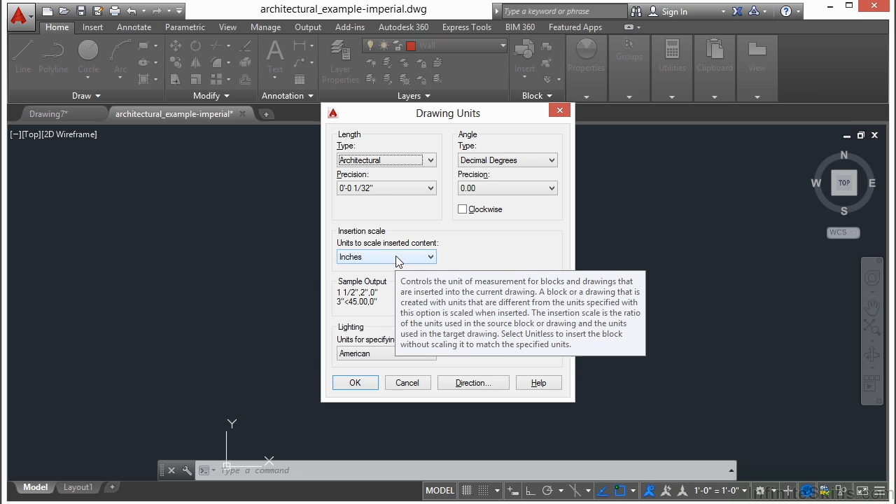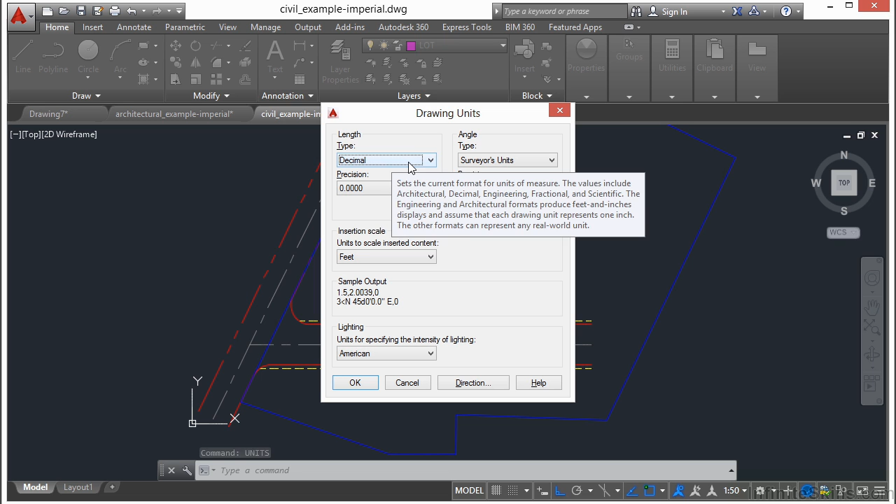Now if we open up, in that same folder, the civil example Imperial, click open. This is just a simple roadway here, a little pond, and a couple of residential lots with an area where a building is going to be. Now, if we type in the word units, we see that this drawing is set up to be decimal feet. Precision is at 4 decimal places, and our units are set up to feet. So whenever we type in the number 1, we're drawing at 1 foot long. In our other drawing here, the architectural example drawing, when we type something 1 unit long, it's 1 inch long.

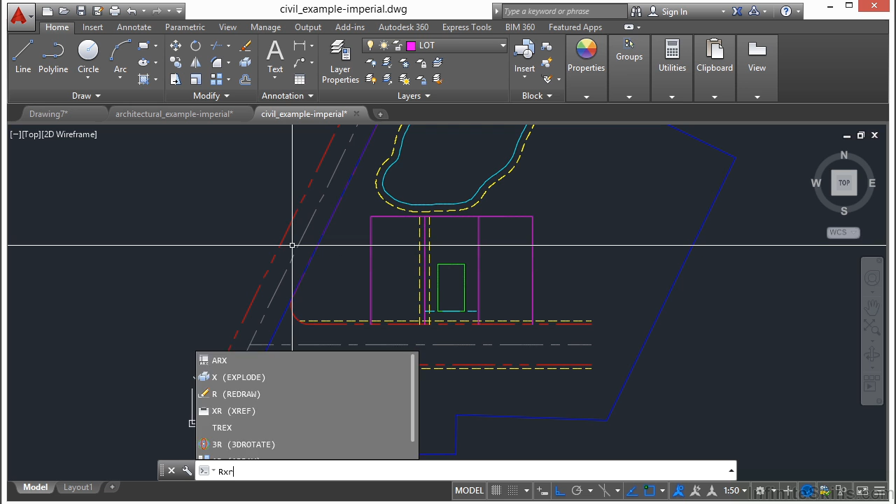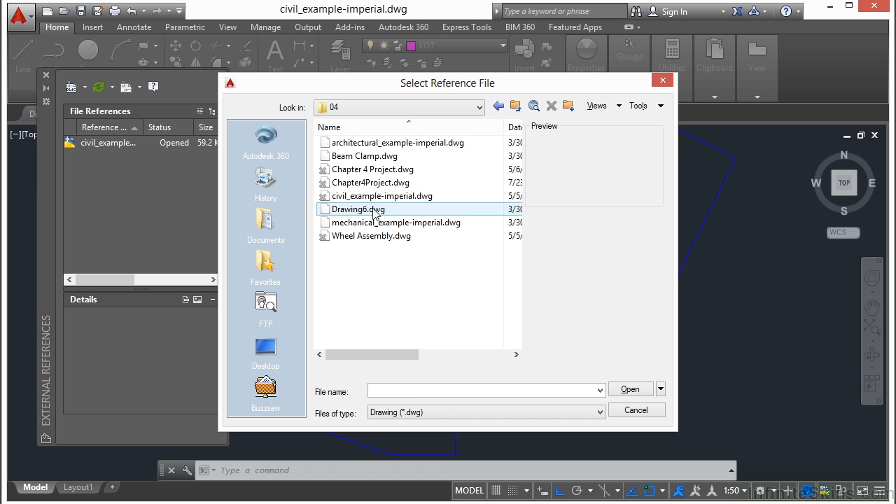So now if I want to reference this file in, type in xref, this will open up my xref manager. This will allow me to reference one file into another, and that's what I'm going to do here. I'm going to reference in my architectural example file. And here it is. I'm just going to insert it right there. So now you see my drawing right here of my building. And because I have my units set up properly, I can put it on one of my lots.

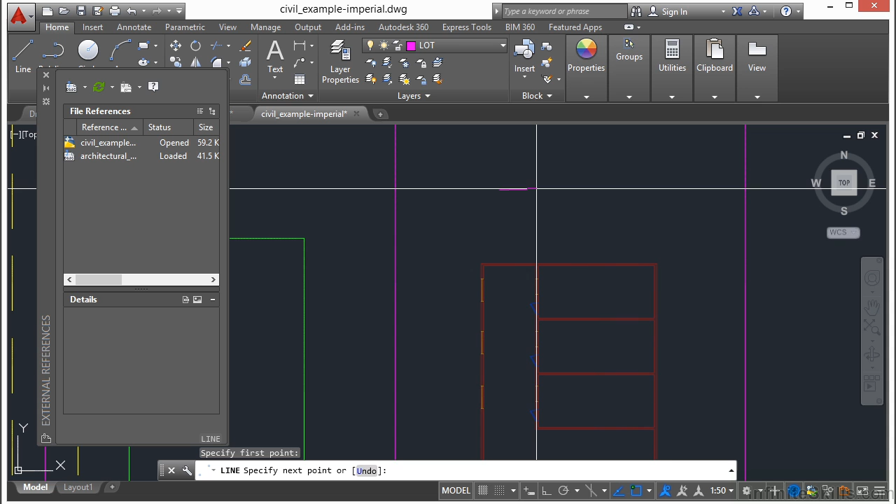Now, AutoCAD knows that whenever I draw something 1 unit long here, as an example, I'm just going to draw a line, type in 1. And it is 1 unit long. Now we see here that this item in comparison is 1 foot long. That looks about right. This wall is about 1/2 foot. So that line should be about twice as long as that wall is wide.

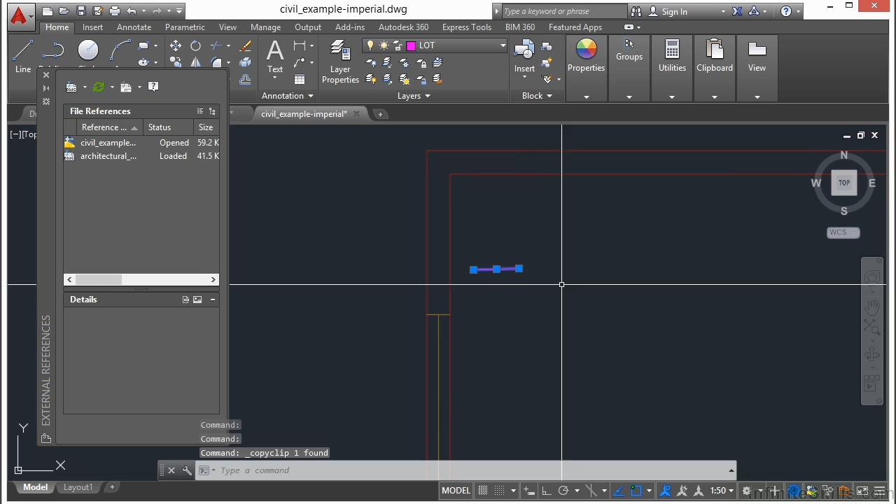If I select it here, press Control-C to copy that object, and I go back into my architectural drawing. Remember, I'm bringing in an object that's drawn at 1 unit. And it should be twice as long as this wall is wide. Control-V. It's not. We see it's much smaller. Very much smaller. Because in this drawing file, AutoCAD sees 1 unit as being 1 inch. So that kind of gives you an idea.

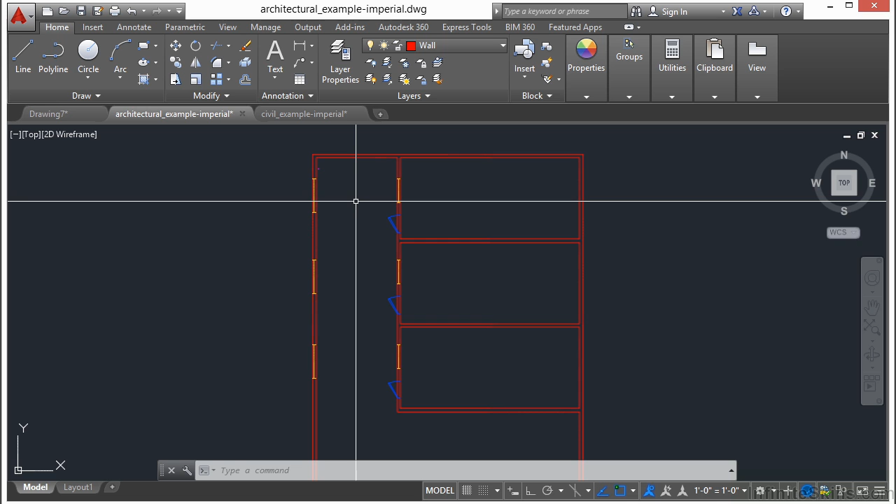But when I'm using reference files, AutoCAD says, hey, look, my main drawing that I'm in, the civil example drawing, is drawn in feet for units. And the file I referenced is drawn in inches. Oh, that's a scale factor of 12. I need to scale this so everything is drawn correctly in real world lengths and units. And so it knows that. Now that's great. So that's one important reason to make sure that you have your units set up.

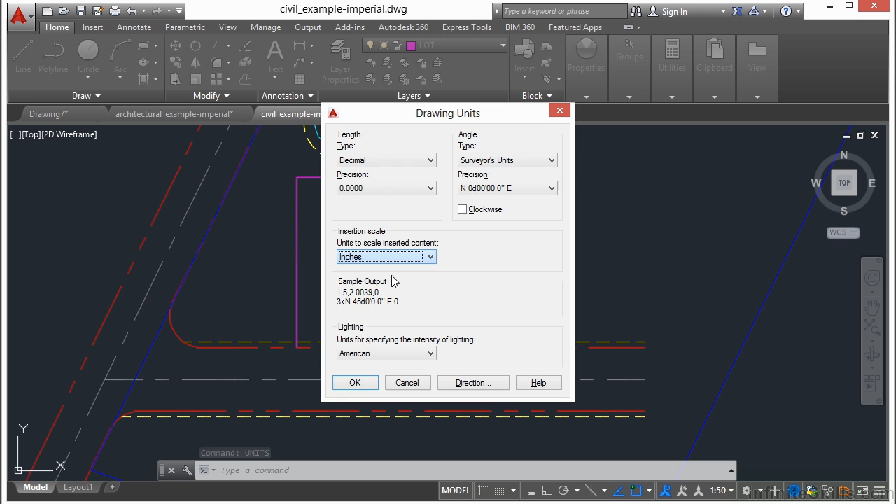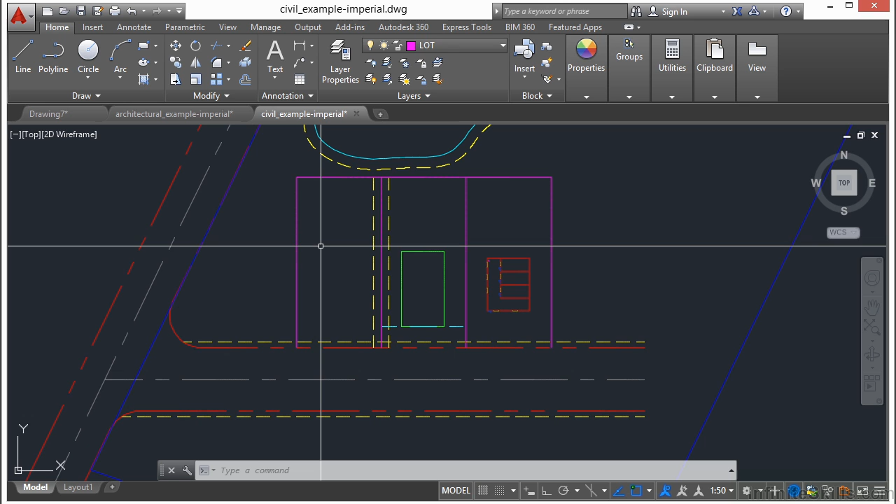Now, if I have these set up incorrectly, say that I set them to inches, click OK, and I try to reference this in, it's going to be 12 times too big. Now, this also works between imperial units and metric units, or vice versa. So it's great. So keep in mind with this little demonstration that your unit of measure in AutoCAD is relative, but it does matter, especially when you're working with other drawings defined with different units.